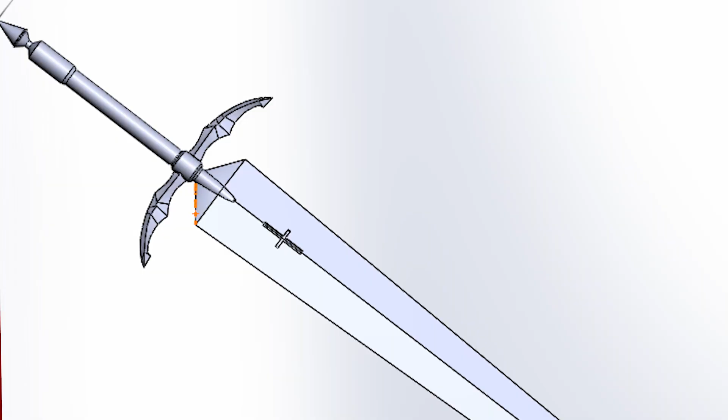First things first, before drawing your model, you want to find a pretty decent reference. Just scroll onto Google and search for a picture that's relatively flat, where the weapon you're trying to replicate isn't angled, because this makes the process way easier in the CAD.

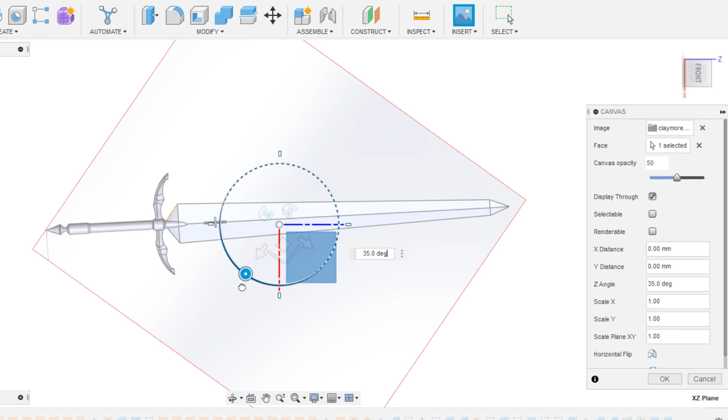Save that file, start Fusion, and hit the insert button so you can put the downloaded image in as a canvas. The canvas is basically a semi-transparent image you can use to map out your lines, so you don't have to eyeball too much of it.

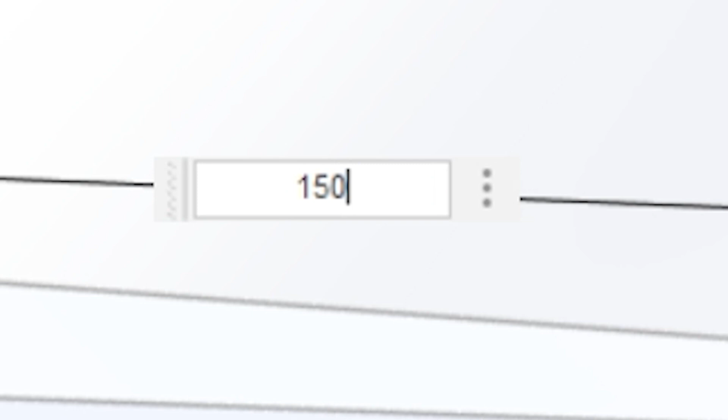Once that's done, calibrate the canvas by hitting two points and typing the specified length you want. For me it was 1.5 meters, so 150 millimeters, something like that. At this point we're basically ready to start drawing.

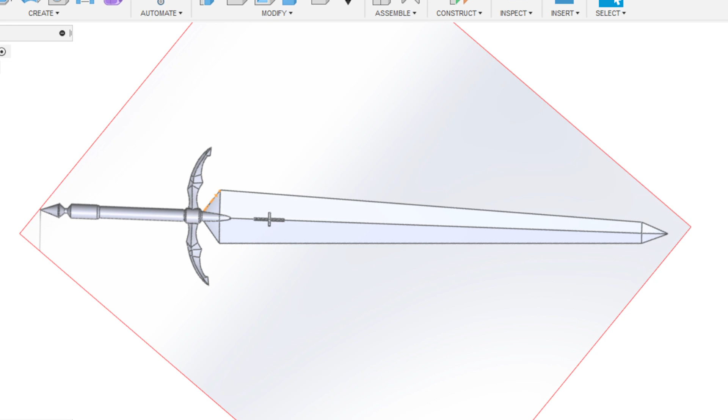If we take a quick glance at the sword design, there's actually not much to it. We can split this sword into 4 different parts: the blade, the handle, the handguard, and this small engraving. So we basically only have 4 major steps to do here.

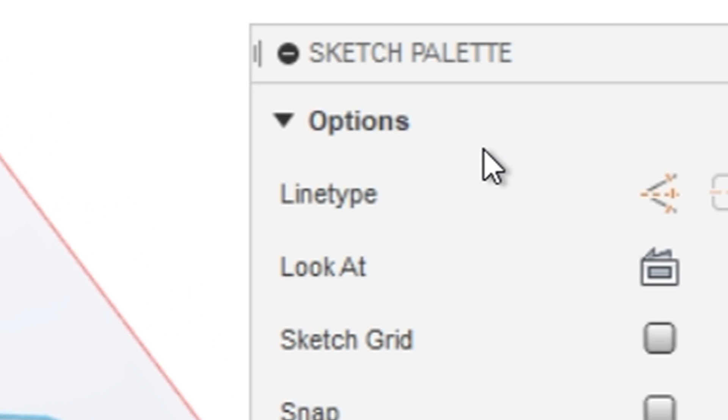First let's start with the blade. You want to hit sketch and trace the outline of the sword. This is where it gets pretty game breaking. Drag your mouse onto the sketch palette and look for the lowest option in the box that says 3D sketch, and click it.

If you press here and rotate your image a little bit, boom, holy shit, you see that? We're drawing on the third axis, the z-axis. This is not doable on paper. This is why I call this Fusion 360 on hacks, you know what I'm saying?

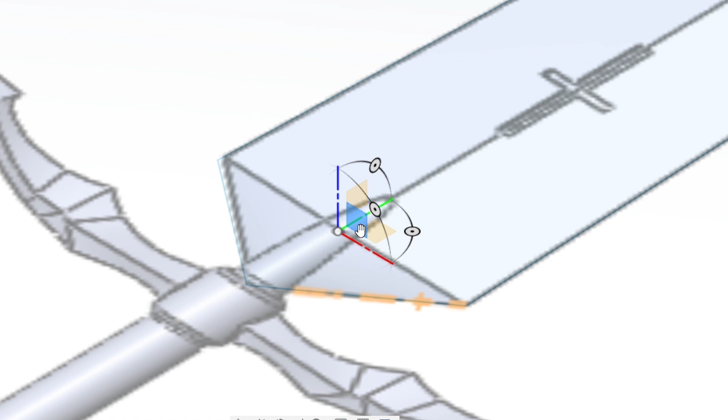Now with this 3D mode activated, we want to draw a point at around 10 millimeter thickness on one side, then connect the remaining lines we see here onto that point. Now we already have one side of the blade done.

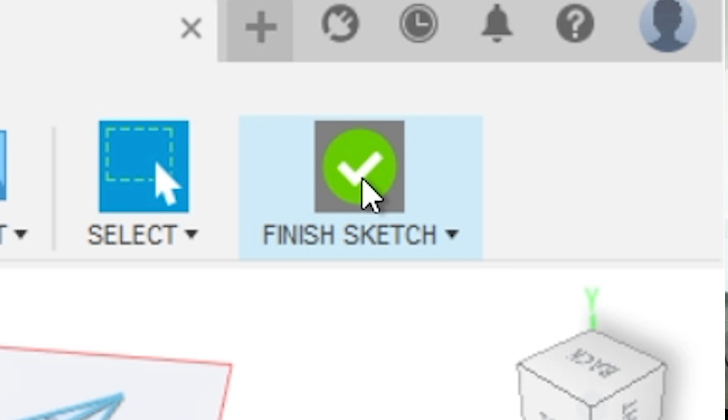All we have to do now is finish the sketch, go to the surface menu, select patch, and click on the lines we just drew. Now we have the surface on one side of the blade done. Just hit mirror and copy the entire thing on the other side, go back to surface, hit stitch, select all of them, and boom, that's our blade done.

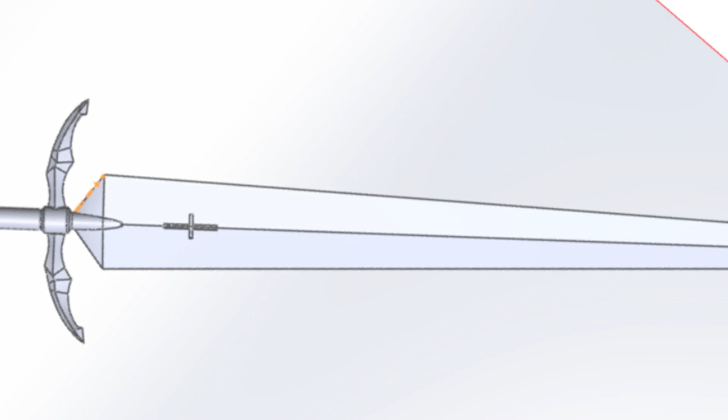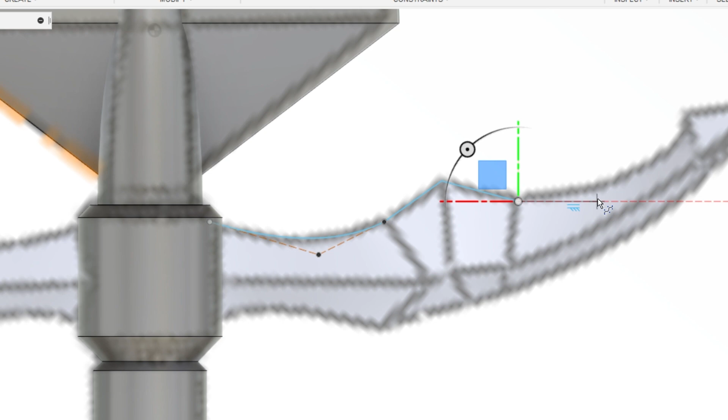The handguard uses the same logic and principle as the blade, so just pop on that 3D sketch and follow along the lines, moving some of them to a third axis when necessary, then use patch to cover everything up.

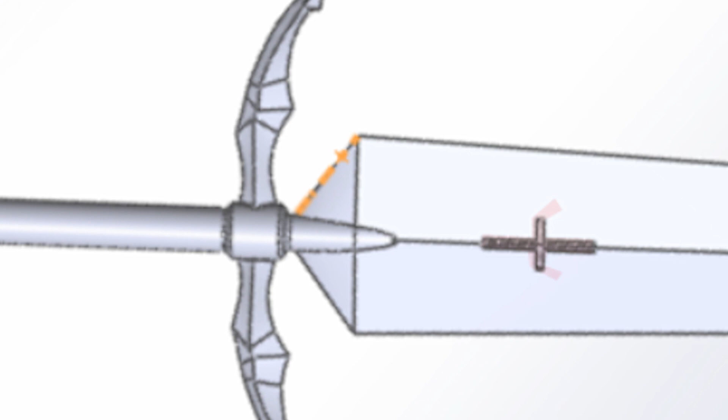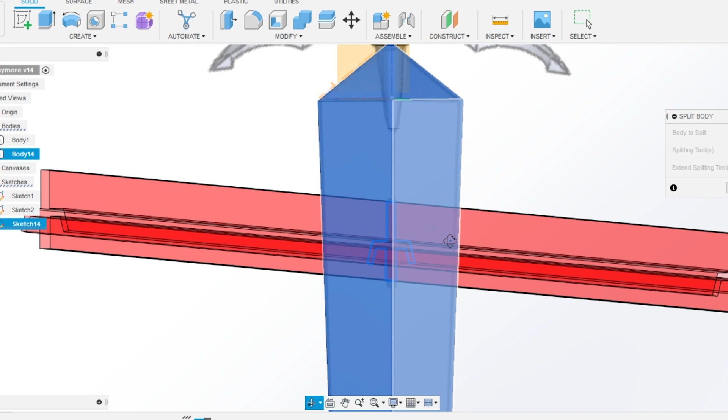That leaves us with the last step, the engraving. Create a new sketch, draw all the engraving on one side, then mirror it on the other side. Leave that sketch, then use split body, select the blade to split, and use that engraving sketch as your splitting tool. With that, you cut out the shape of the engraving. If you move this around, you basically have a cleanly cut hole and the content of that hole right here.

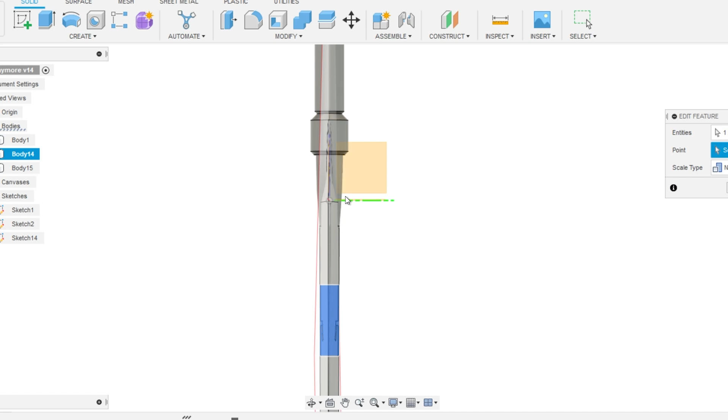And now you're going to want to scale that cut out engraving down. So grab scale and then choose a point. Make sure it's somewhere on the middle and not on top here, or else this is going to mess up your scaling. Select scale type to non-uniform, and adjust the scale to something like 0.7. Yeah, 0.7 sounds good.

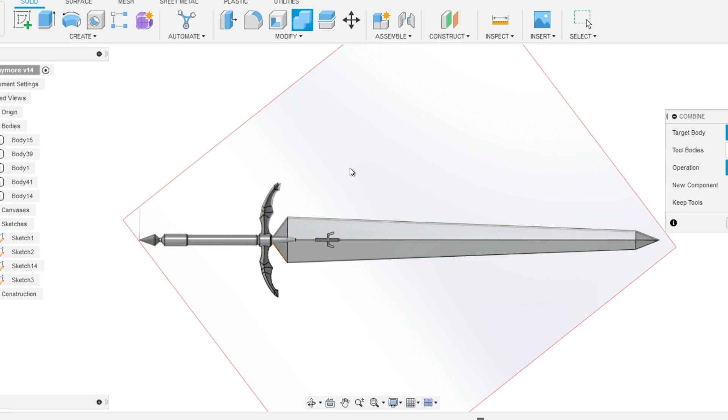That's basically our Claymore done. Now we're just going to want to combine every single part so that we have one solid piece of Claymore. You're just going to want to select one body and then select the rest of the body, and boom, that's the model done right there.

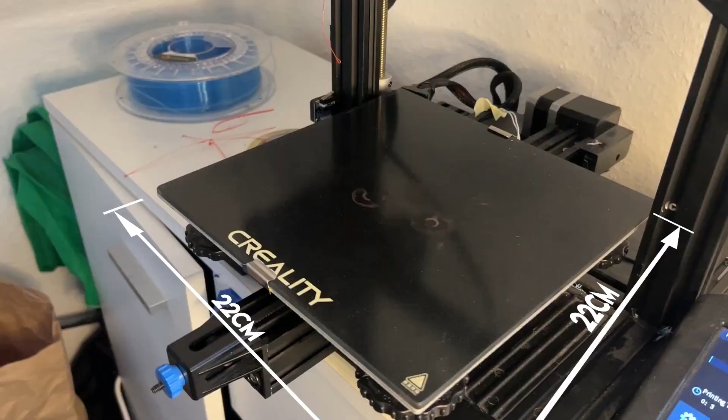Now we're going to be preparing our parts for 3D printing, because obviously we cannot fit a 1.5 meter sword into a small 3D printer like mine, now can we? So we're going to want to cut the sword into smaller pieces that would fit in there. As you all know, the average printer is about 15 to 30 centimeters long. Personally, my Ender 3 is about 22 centimeters long and wide.

But here's the thing, we can use Pythagoras theorem and use the diagonal side of our bed to get more printing space that way. Using that, I'm able to get a 31 centimeter length max instead of the 22 centimeter, which honestly in my opinion is pretty significant, you know what I'm saying?

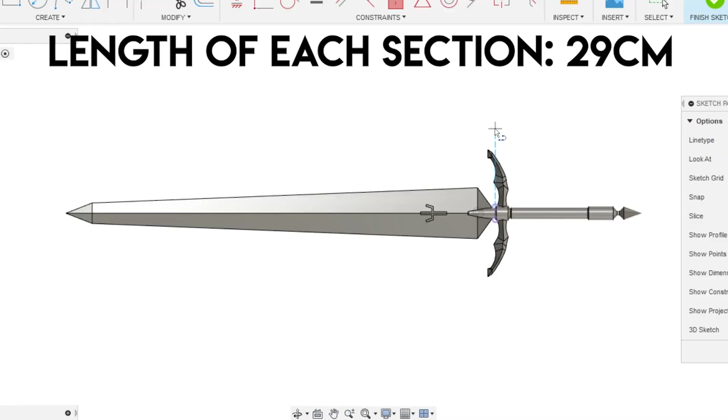So I'd want to cut my parts at around 29 centimeters just to give it a little bit of clearance. I'm just going to draw a bunch of lines to use the split body on, and then cut the blade into the appropriate sizes.

Now once we have our blades cut out, let's think of how we're going to put the blade together once we're done. If you've been following my channel for a long time, you probably knew I used one of those small connector profiles that you'd put at the end of each section and then connect it to the other one. Well, that one's fine, but back when I made my Claymore video, this happened.

Bruh. So honestly, I'm a little bit pessimistic that those small connectors are going to hold out against this much weight, which is why we're going to have to go with something stronger.

So I was walking in Home Depot the other day and I stumbled upon some of these aluminum rods. Aluminum is more resilient compared to plastic, so at least if the sword breaks, it's not going to snap in half right off. It's just going to crack a little bit, and then it would probably be much easier to fix. In short, the aluminum rod is going to absorb the damage by a large amount.

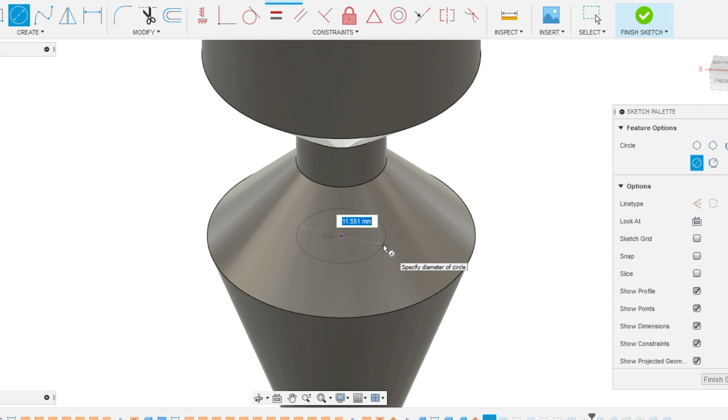So I'm just going to quickly draw a 6mm hole, and then use extrude to cut it about the length of 142 centimeters throughout the blade, creating a hole in each section so that we can connect the blade later on. And now once the model is done, we've already cut it into smaller pieces as well.

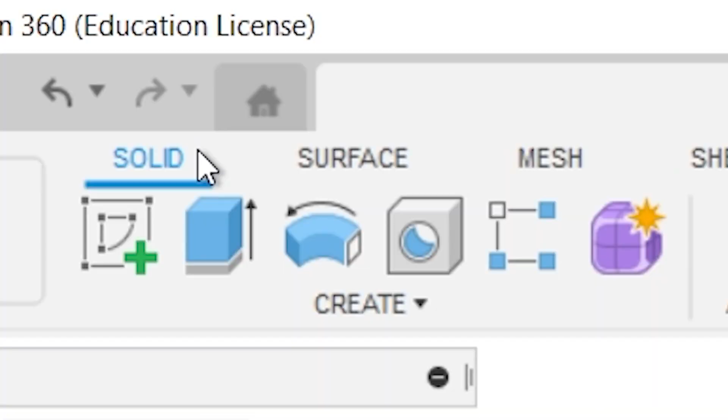Here's how we can transfer this model onto Cura so that we can prepare it for printing. So you scroll down to the Utilities tab, and then you hit the 3D print option, scroll down, uncheck that box, okay, and then you can just save it wherever you want. Now once that's done, we can just go start up Cura and start slicing.

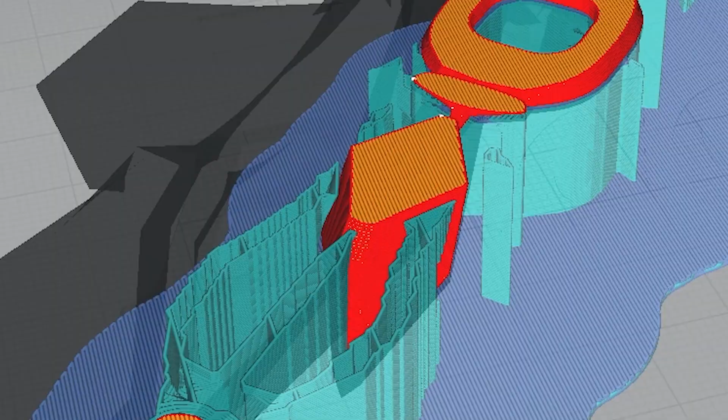For those of you who don't know what slicing is, it's basically just preparing your parts for printing. This is basically calculating the amount of material that goes in here, also generating the commands of how your printer is going to be moving in order to create this part.

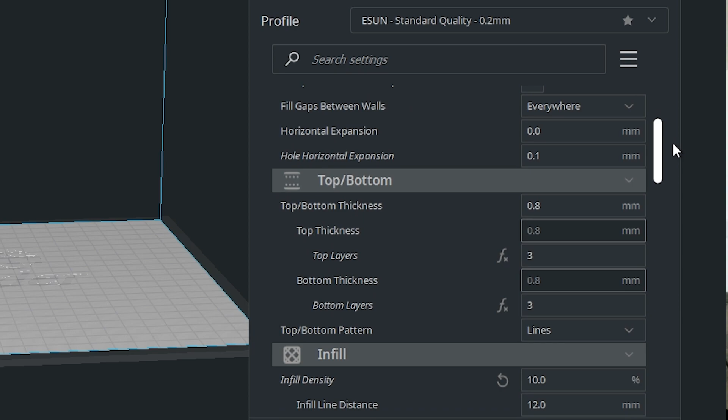So now we're just going to want to import the file and then rotate it around a bit, specifically diagonally, so it would fit our build plate, flatten it on the bed, and then just tweak the settings a bit. Now there's actually not much to the settings. I'm just going to let this scroll down slowly on screen so you guys can copy it.